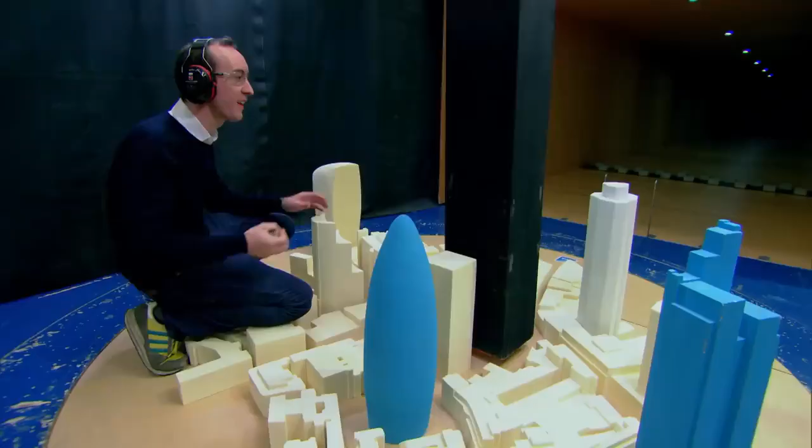The most technologically advanced skyscraper on the planet. Look at this super tower, 632 meters tall. Built to withstand earthquakes and typhoons. I still feel like it's a dream. It's still unbelievable. And the pioneering historic designs. This is just amazing. This is real engineering happening here. That made the impossible possible.

Shanghai is a mega city. With 24 million inhabitants and rising, it's one of the most densely populated cities in the world, with ambition to match. Shanghai will always be one of the international cities in the world and one of the most important ones in the world. This global financial center holds 10,000 people per square mile, and the only place left to build is up.

In the mid-1990s, development began in an area of farmland on the East Riverbank, known as Pudong. If you look at Pudong today, 20 years after, it has been transformed into an international center for business from a quiet farmland, and today is dominated with a lot of new high-rise buildings. In November of 2008, work began on the most impressive of them all.

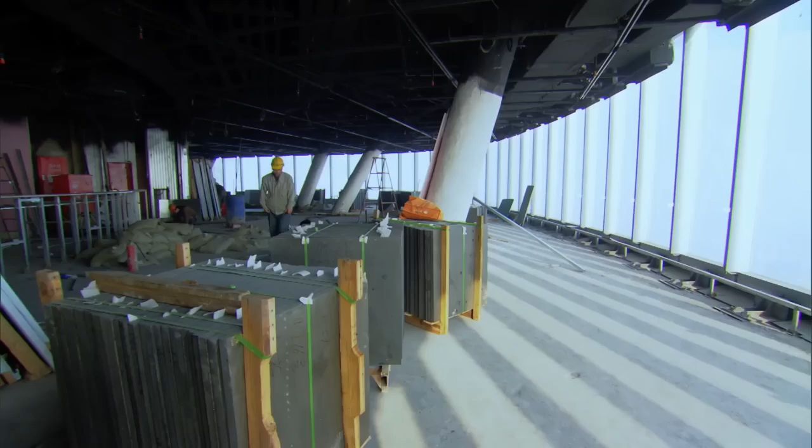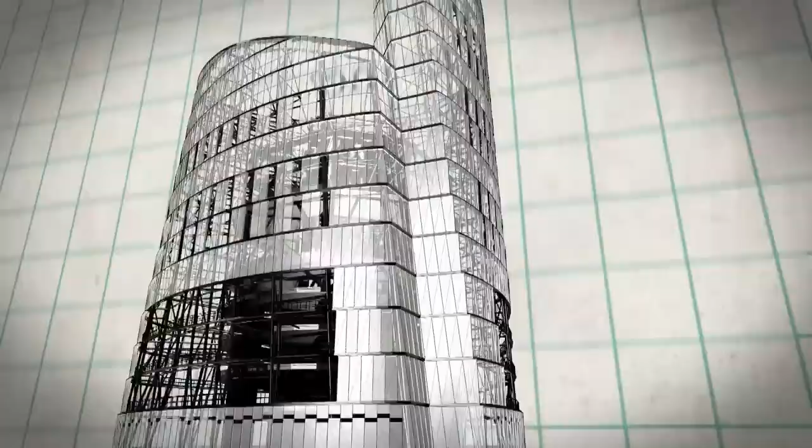At an astounding 632 meters, the Shanghai Tower will be the second tallest building on Earth, the tallest in China, and one of the tallest ever built in a seismic zone. It will be the most advanced building of its kind on the planet, with 128 floors and 9 indoor gardens, where 16,000 people will work, sleep and shop, making it a true sky city.

And yet, this is one of the most difficult places on Earth to build a skyscraper. Building a super high-rise building in Shanghai is quite unique because you have to deal with the wind load and also the earthquake load. For Dennis Poon and his fellow engineers, it's a seemingly impossible challenge. I cannot believe that today we're designing the tallest building in China and also the second tallest building in the world.

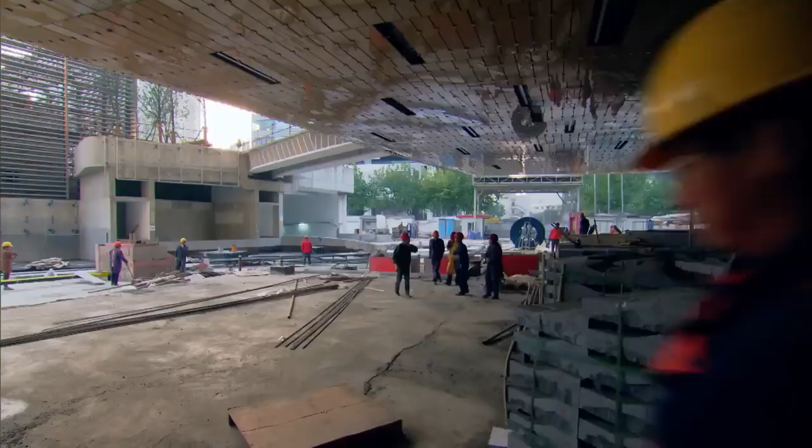The engineering complications begin at this mighty tower's roots. Because not only is Shanghai an active seismic and typhoon zone, but amazingly, this megacity is sinking into the soft soil below. The land under this massive metropolis is deflating like a giant air mattress, as its shallow water table collapses under the weight of its modern buildings.

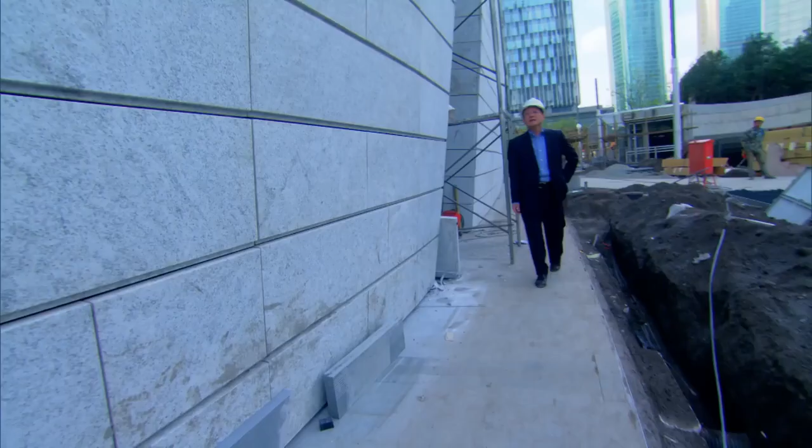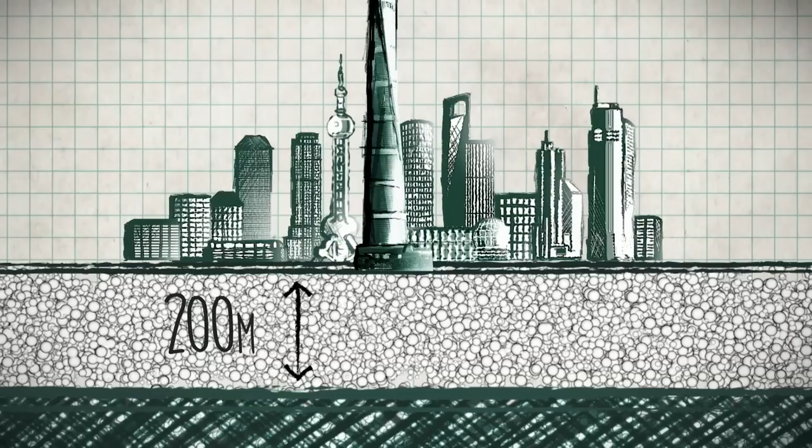For the Shanghai Tower, one of the biggest challenges is the foundation to support this super tall building. With its weight of 850,000 tons, how do you support it in the soft soil condition, which is local in Shanghai? The solid bedrock is 200 meters down, with Shanghai itself wallowing on a soft layer of sand, clay and soil. A geotechnical nightmare ready to swallow an 850,000-ton building like the Shanghai Tower.

So we have to design and build this foundation for the tower to deal with these challenges. And the engineers only have one shot, as constructing a tower this tall leaves no room for error. For a super tower, of course, the whole design challenge is to do the foundation right, so you don't have future problems, because you can't fix it later. The engineers will have to look to the great innovators of the past to defy this seemingly impossible challenge.

Once upon a time, the modern world of skyscrapers was inconceivable. Early man was limited by what nature would provide. And for the ancient Egyptians, taller had to mean wider, and an awful lot of manpower. Unless you believe in some of the more otherworldly theories. And when it's come to building towers, the ground below has frequently thrown a spanner in the works. Mamma mia! In order to create a skyscraper 11 times taller than Pisa's famous Leaning Tower, the designers of the Shanghai Tower will need to draw on the inspiration of 19th century engineering pioneers.

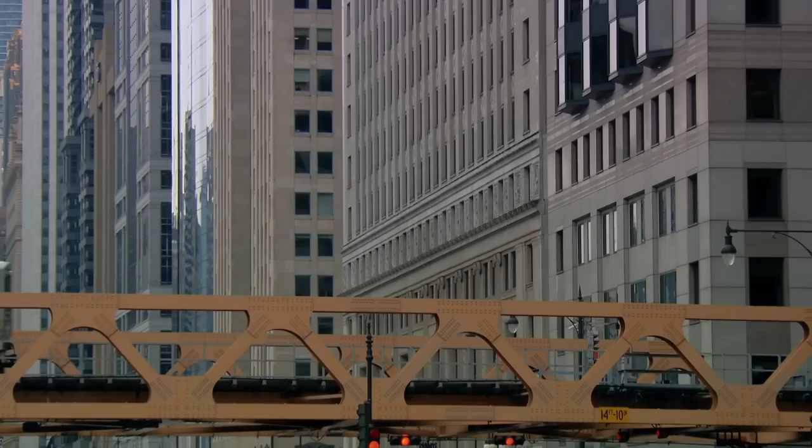We've got soil here that is incredibly squishy. Underneath this shorter, smaller layer of earth, we've got a very, very deep layer of soft, squishy clay. This is a really difficult thing to build a skyscraper on, of course, because when you load it, the building's going to sink. As property in downtown Chicago grew ever more valuable and the city began to boom, the need to grow higher and maximize space posed engineers a problem. Taller buildings would mean heavier buildings, and, as they had discovered, there was a limit to the weight that the local soil could take.

This is the auditorium building of Roosevelt University, designed by Adler and Sullivan in 1889. It's a national landmark and so important to Chicago as well.

The building is 72 meters high. When it was completed in 1889, it was the tallest building in the city, one that would have been unthinkable just a few years earlier. And the radical innovation that made it possible came from engineer Dankmar Adler.

We're headed down to see Adler's specially designed foundations to deal with the soil here in Chicago. Previously, the whole weight of a building would bear down on its walls, which would sink into the clay like a cookie cutter.

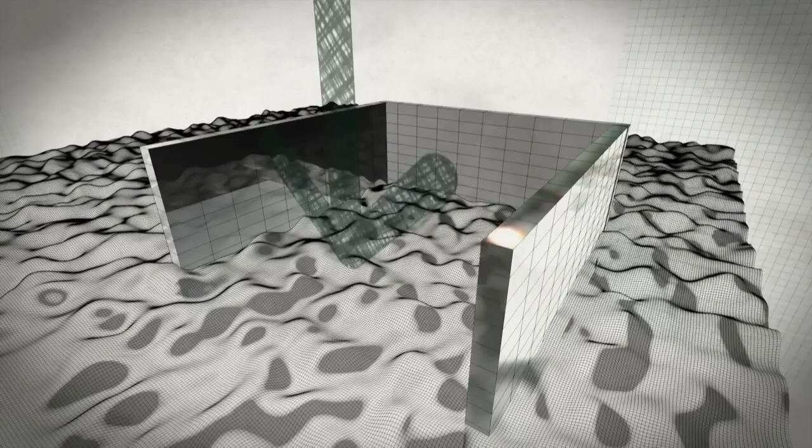Adler's innovation was to use wood and steel crossbeams encased in concrete to create a reinforced concrete raft that the 110,000-ton building sits on. I'm going to illustrate what's happening here with this piece of modeling clay used to represent the clay that's under our feet here in Chicago, this sort of peanut butter jelly-like substance.

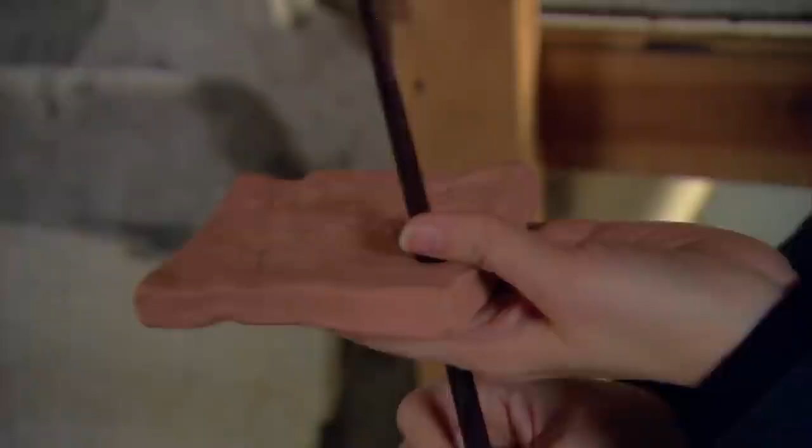The clay is really quite deep, and the bedrock doesn't start in Chicago until 75 to 100 feet below the surface. So I've got my chopstick here to sort of illustrate, and I take my structure and I go through the hard pan, and they just didn't have the technology in the 1880s and the 1890s to excavate that far down to bedrock. So instead, architects and engineers here in Chicago are coming up with new ways to solve this problem.

The method that we're standing on here is sort of the equivalent of this kind of penny that I'm going to illustrate. So this pad or this raft is put down, and then the building, the column, is put on top of that. And you can see that I can push it down a little bit into the clay, but not really that far. This is distributing the load.

Adler's revolutionary engineering solution made building on substandard ground possible. And today, the city's tallest building, the Willis Tower, rises 442 meters, more than 6 times the height of Adler's auditorium. But despite its influence, the auditorium's design wasn't 100% perfect.

So on the north edge of the building, we've got these large, heavy exterior walls that are much heavier than what's happening on the interior of the building. And we can see the challenge with that, the fact that this is much heavier and this is much lighter in the building, with this long crack here in the floor. And we can also illustrate that pretty well with these marbles.

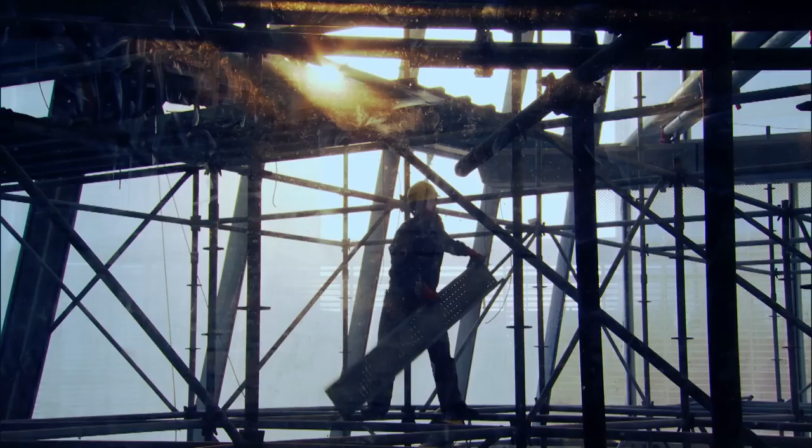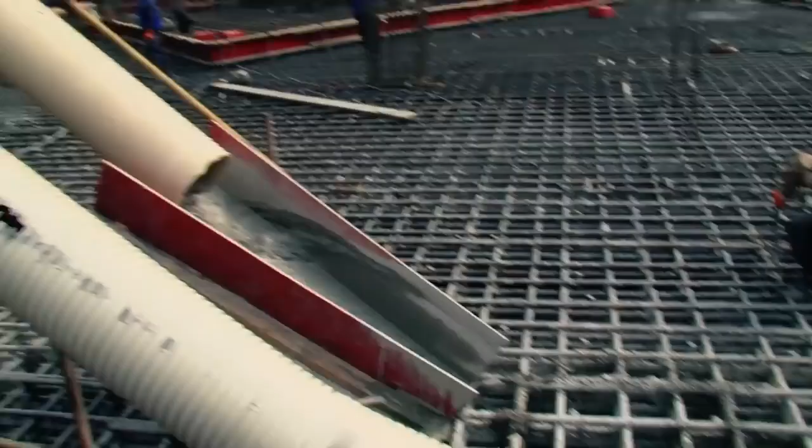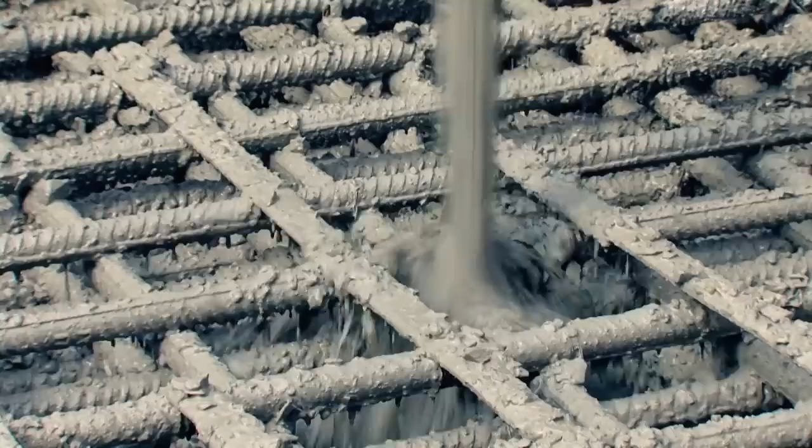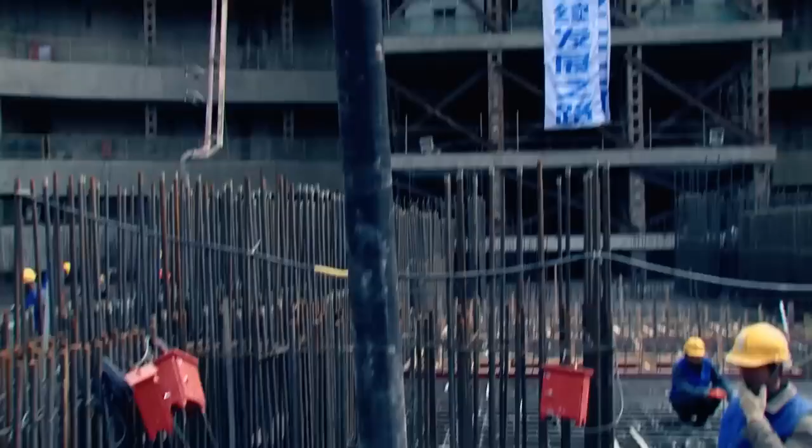In 2008, a 2-year operation to build the foundations begins. First, they sink hundreds of deep supporting piles into the soil, then begin pouring the raft or mat foundation. Construction of the mat foundation so deep below grade is a big challenge. It takes a world record 60 hours of continuous pouring to create the mat, a process involving 2,000 workers and 450 concrete trucks. We basically used almost all the concrete trucks in Shanghai, and finally we overcame this challenge.

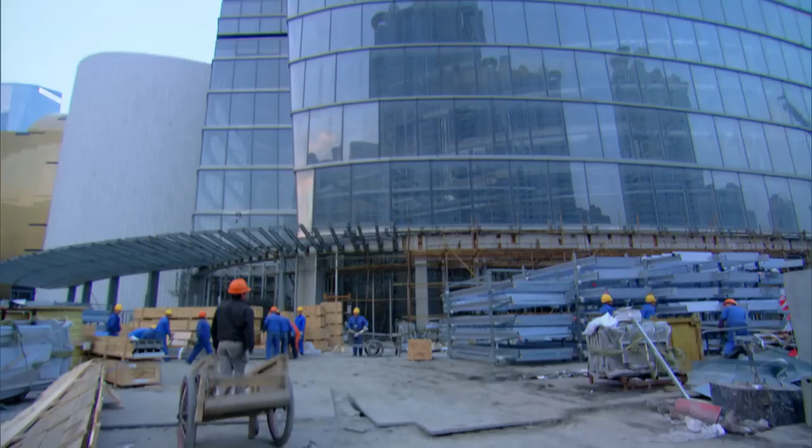All in all, the mat soaks up 61,000 cubic meters of concrete. Another world record. 61,000 cubic meters is a lot of concrete, comparable to the Hoover Dam many years ago in the States. Without the pioneering work of engineers like Dankmar Adler, building a tower this high in Shanghai would have been an impossible dream. You can see the sheer scale of this tower, and you can imagine how big the foundation we need to support this tower in a soft soil condition. And we got it done right. Look, I even cannot believe it.

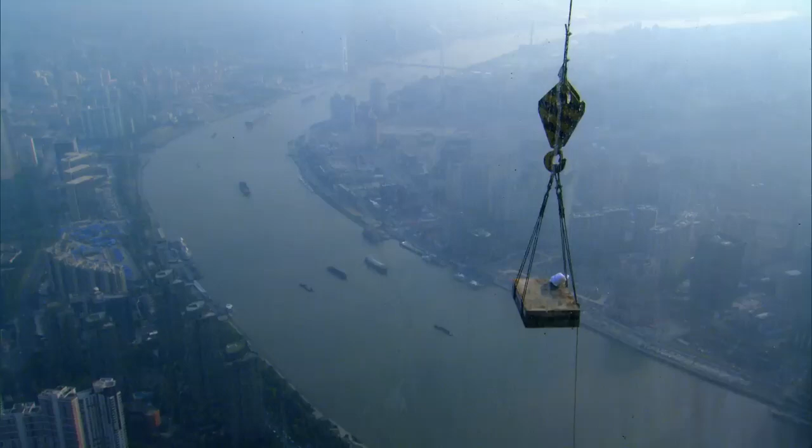Begun in 2008, the Shanghai Tower will be the most advanced skyscraper in the world. The tallest building in China and the tallest ever built in a seismic zone. It is a fantastic piece of engineering. We are all grateful that we have the opportunity to work on this iconic project.

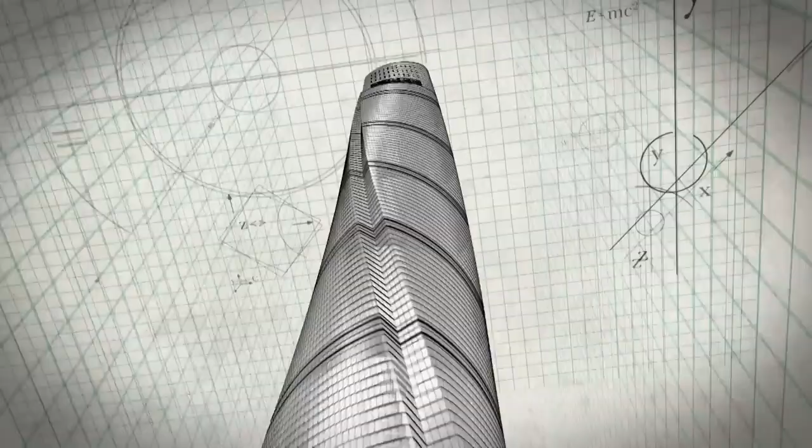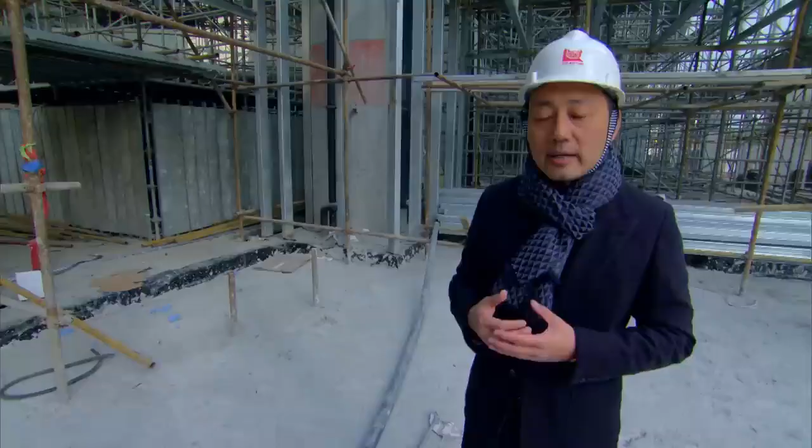The tower is a massive 632 meters tall and will consist of 128 stories of cutting-edge engineering and contain gardens, shops, hotel, office space and residential accommodation. Actually, to build it and also overcome many engineering challenges, to me, it's quite incredible and unbelievable. But in creating a building this immense, the architects and engineers have set themselves a seemingly impossible challenge.

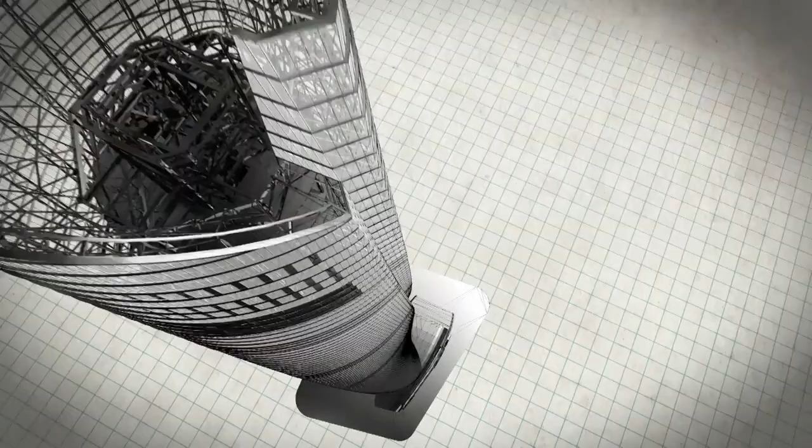Each floor weighs an average of 6,500 tons, making the building enormously heavy. The structure itself has to support a total of 850,000 tons. For a super tall building, you have enormous forces to support. We're not building a house, we're building a 128-story building, the second tallest building in the world. It's a challenge that would have been impossible if today's engineers weren't able to draw on the great innovators from history.

Once upon a time, the maximum height of a building was determined by the thickness of its walls, because the weight of each story had to be supported by the floors below. It meant tall buildings remained the realm of the rich and powerful. Medieval religious architects enabled thinner walls and large stained glass windows by using external supports called flying buttresses. But these also made buildings grow sideways and were still the preserve of the wealthy church. Bless you, my child. But there was a revolution on the horizon.

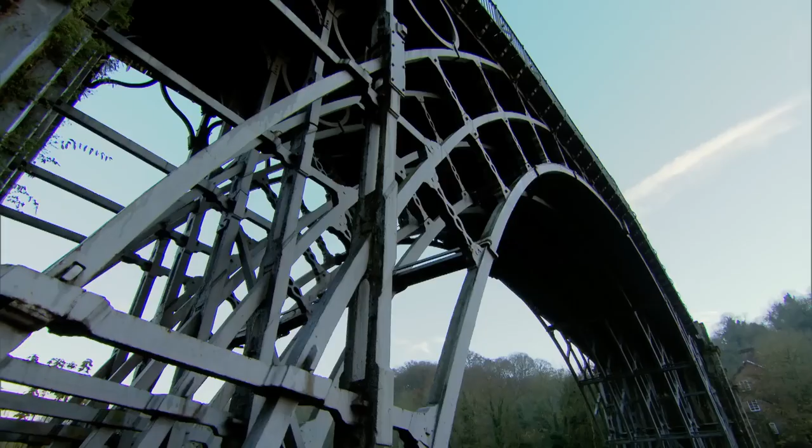And this seemingly innocuous and picturesque region surrounding the River Severn in England was the crucible of it all. Shropshire was at the heart of the Industrial Revolution, the Silicon Valley of the 18th and 19th century. Its engineers were at the very cutting edge of technology because they had mastered the production of iron. This area gave birth to some of the greatest engineering pioneers of our time and enabled the construction of iconic structures like this Iron Bridge, the first cast iron bridge of its kind in the world.

But just a few miles upriver is a somewhat less iconic, but arguably much more significant building. It wasn't until about 20 years ago that the historical importance of this building was properly understood, which is why it's fallen into disrepair. This crumbling red-bricked mill is one of the most important buildings in the world. This incredible but rather sad and dilapidated building in Shrewsbury is arguably the world's first skyscraper.

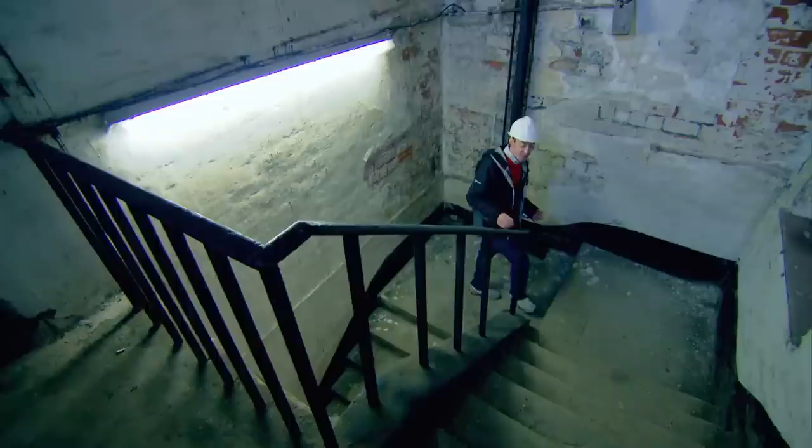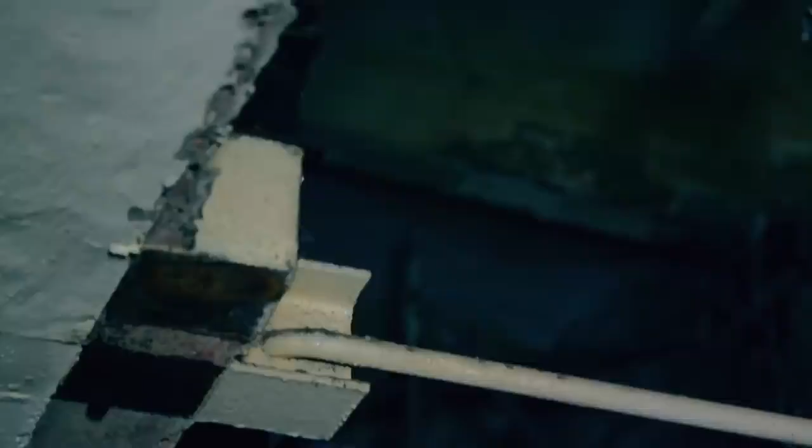It's the first time that iron was used in a multi-story frame construction, and it really paved the way for tower blocks and skyscrapers that we know today. Built in 1796, Ditherington Flax Mill was the brainchild of engineer Charles Bage. And he drew on the region's groundbreaking use of iron to build the first metal-framed building on the planet. Previous to the iron frame, the taller the building, the thicker the walls had to be to support them. But with Bage's design, the walls could be thinner, which meant that the rooms could be much larger. It also meant that you could design buildings much taller.

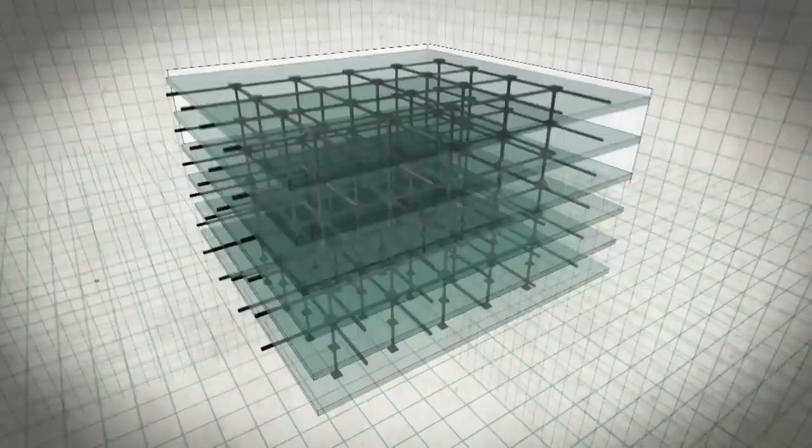In Bage's design, all the weight of the building was borne on its iron frame. So none of the walls were load-bearing, making the sky the limit for the first time. This main building had 5 floors, including this attic, which was previously unheard of. It had a working area of over 2,800 square meters, or 31,000 square feet. And these narrow, relatively lightweight metal beams would be able to support much more weight than the solid brick walls of previous buildings.

This simple but brilliant engineering solution meant that Bage's flax mill was the forerunner of almost every large-scale building in the modern world. What Bage achieved in this building was truly remarkable. In building the Shanghai Tower, its engineers are employing the same principles as Charles Bage's 5-floor flax mill, but on a whole new scale. The 128-story building, however, will have a steel frame instead of iron.

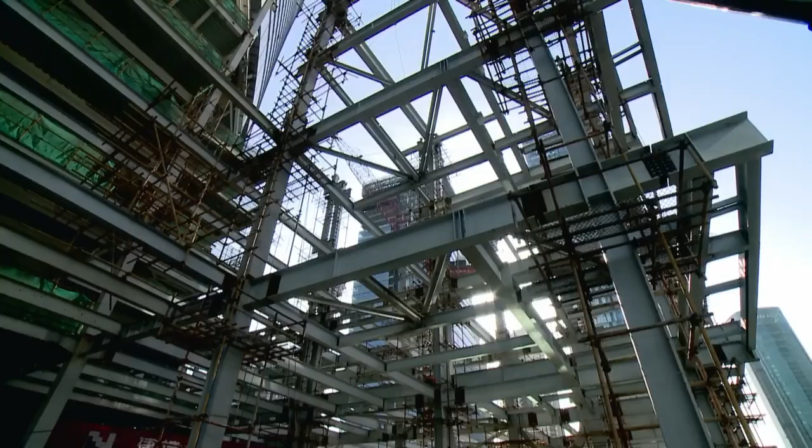The advantage of structural steel is it's lightweight, it's high strength, and easy to erect, and can be prefabricated in the shop with better quality control. Because the steel bears the weight of the structure, the external walls no longer need to be load-bearing. They don't even need to be flat or straight. They can be made from a variety of lightweight materials, such as glass. And architects can mold them into any shape they want to express their vision.

Jun Xia was one of the lead designers on the project. When you are in the city looking at this building, from every different view you look at, the building looks a different shape. The movement looks different. You feel like it's alive, something like a living organism, you know, because it doesn't feel like a dead, cold object.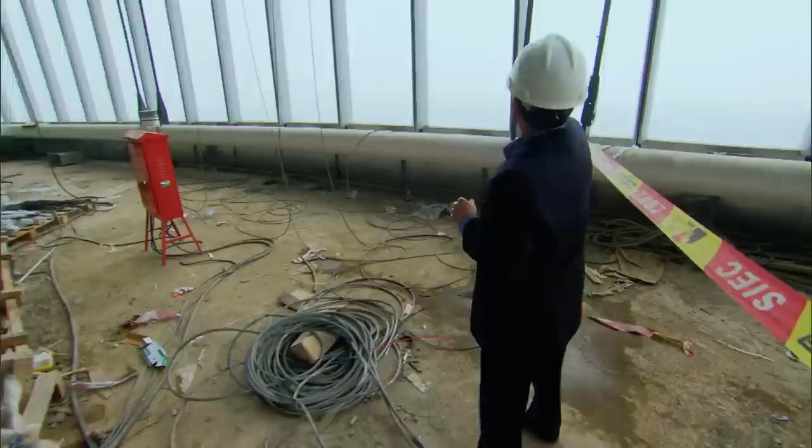The whole building is clad in a series of glass walls, each of which can be suspended over many floors like a giant curtain, thanks to the strength of the steel rods that hold them in place. We're at the top of the 101st floor of the building, and you can see the curtain wall is being hung 14 floors above us.

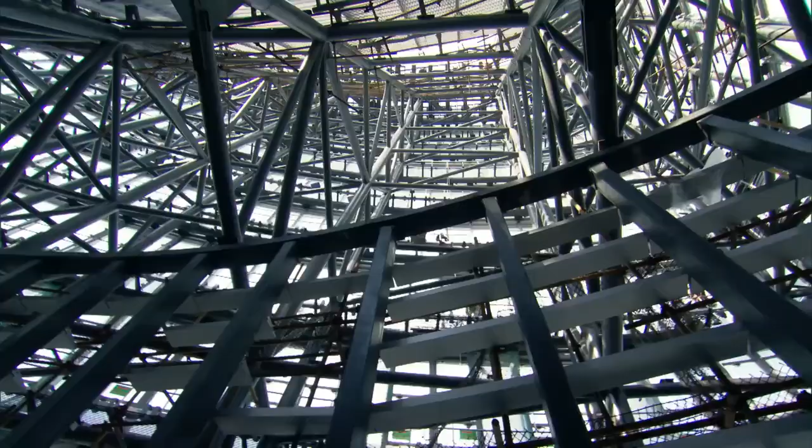Between the curtain wall and the inner core, which houses offices and hotel rooms, the designers have allowed the building to breathe, creating a massive open atrium, only possible because of the building's lattice-like steel frame. Here we are standing on the 8th floor of the building. You don't want to block too much sunlight with a massive structure. It opens up the airy feeling.

Yet despite the use of super lightweight materials, the Shanghai Tower weighs in at a staggering 850,000 tons. And to stand up to Shanghai's triple whammy of high winds, earthquakes, and substandard soil, the designers would have to reach for the history books again.

Ready whenever you are, Rich.

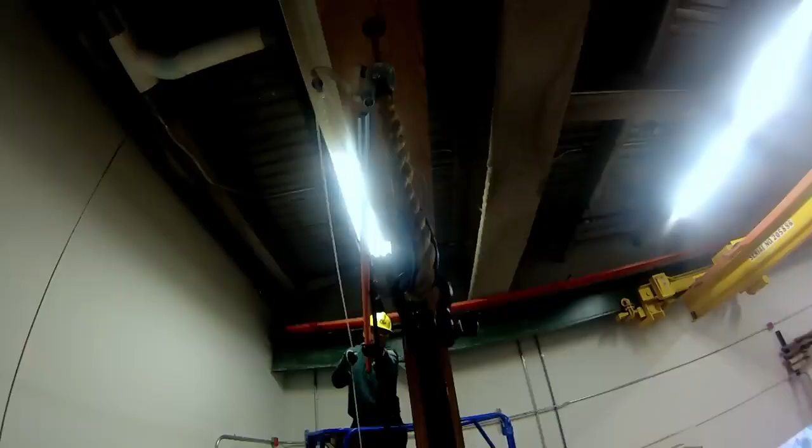With 24 million inhabitants, Shanghai is one of the most densely populated cities on Earth. And the only way of expanding its globally important financial center is to reach for the skies. 632 meters tall, the Shanghai Tower is being built as a living city in the clouds. It will house offices, shops and hotel rooms, as well as conference and concert halls.

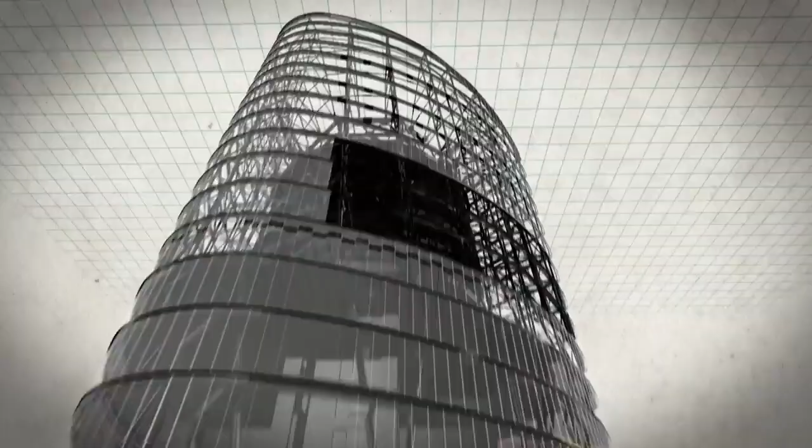If we turn this building down, it's going to be 600 meters long, about 6 urban blocks. So in a way, we think each of these zones is a community. But in creating a super tower in which 16,000 daily users will work, rest and play, its designers have set themselves a lofty challenge: how to transport its population around this massive structure.

Who wants to come up to a 100-story building and walk up there? I can see many office buildings with a huge crowd in the lobby. It's an engineering feat that would be impossible without one of history's great innovators.

By the mid-19th century, the world's skylines were still relatively skyscraper-free. For one reason, no one wanted to take the stairs. Unlike the penthouses of today, the higher you lived, the poorer you were. Mustn't grumble. Steam-powered and hydraulic lifts were being used in mines and factories for freight, but they were too dangerous for people. The ropes on the pulley system were inclined to break.

But city skylines were about to change. Thanks to a man named Elisha Otis, in 1852, he came up with an idea that revolutionized the world of construction, pioneering a simple mechanism that changed the way we use tall buildings forever.

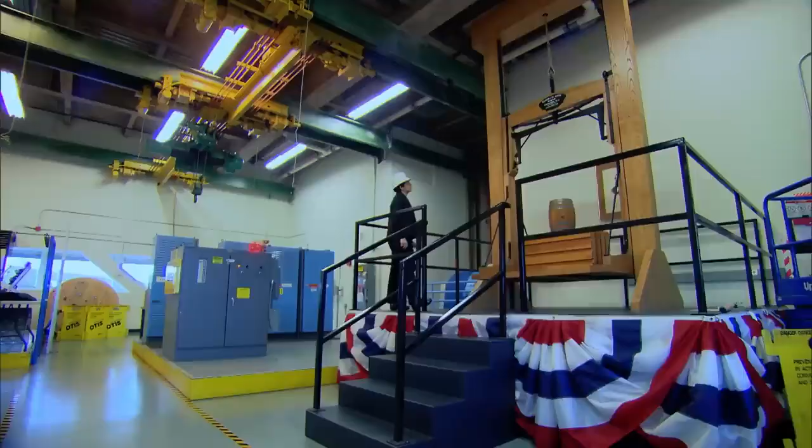So we're here in Bristol, Connecticut at the Otis Elevator Company test facility. This is where they test the newest elevators that they're going to install in buildings across the world. But they also have this replica of a device that Elisha Otis first constructed for the Crystal Palace exhibition, the World's Fair that ran from 1853 to 1854.

The World's Fair was the perfect shop window for Otis, who was a showman as well as an inventor. He knew that the eyes of the world would be upon him if he could prove that his idea for protecting passengers was safe as well as practical.

So I think it's important to remember that Otis didn't invent the elevator. Certainly there had been ways of moving goods and people up and down from floor to floor using hoists and pulleys for centuries. But what Otis did do was to recognize that people were afraid of going into an elevator. So at the 1853-1854 World's Fair, he builds this device to provide a brake, a safety, in case the rope broke.

With his showman's hat on, Otis decided the best way to prove his idea was to put it to the test, using himself as a guinea pig. In front of an expectant audience, he stepped onto the platform, rose above the crowd, and gave the signal for the rope to be cut, a potentially fatal step.

So let's see if Mr. Otis's invention still works. Ready whenever you are, Rich.

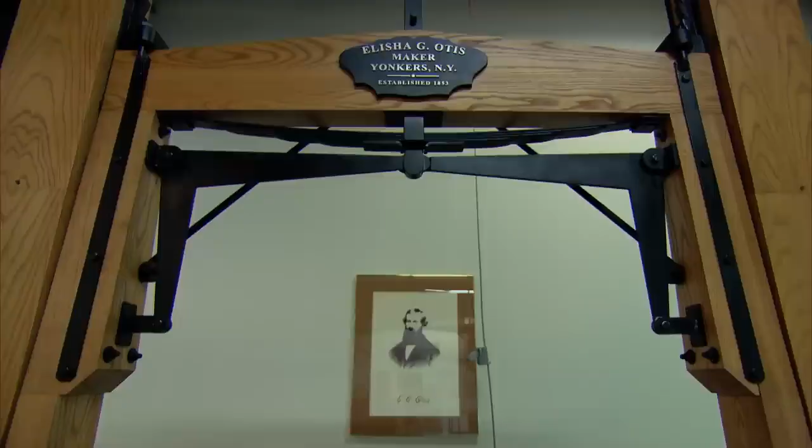The system features a wagon spring, which is held up by a rope which keeps it in a state of constant tension. When the rope is cut, the tension in the spring is released, which causes pins fixed to the side of the spring to lock into a ratchet located in the wooden frame. This brings the elevator to a complete stop, preventing it from falling and injuring any passengers.

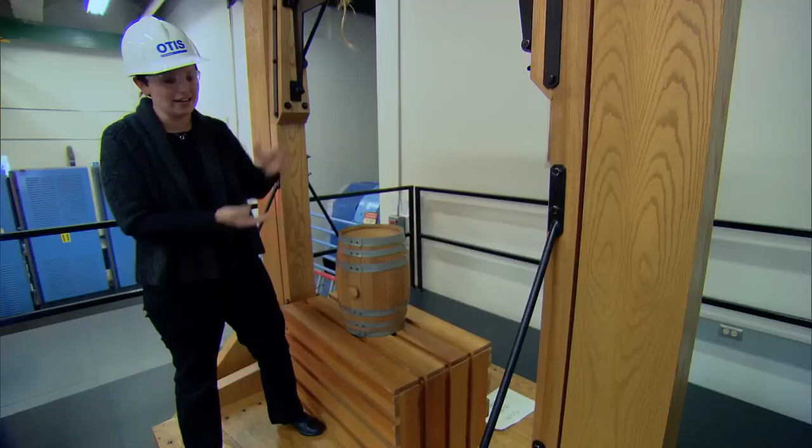And all these years later, every single elevator today around the world has a similar safety device that is allowing passengers to feel safe in tall buildings. And I didn't plunge to my death. Otis's invention transformed the world's skylines, and cities like New York that couldn't expand sideways could now reach for the skies.

Fittingly, in 1913, it was the Otis Company that were commissioned to provide the lifts for one of New York's most iconic skyscrapers, the Woolworth Building. By 1916, more than 100,000 people had paid their 50 cents to ride the elevator to the observation deck at the top. And now, 100 years later, those original Otis elevators are still being used to carry office workers up and down.

Otis's invention meant that instead of the poor being consigned to the building's upper levels, the value of floor space now increased as you went higher. Penthouse living was what everyone dreamed of. As we drive through New York, it's easy to forget, I think, that within just a short span of time, just about 160 years, all of these skyscrapers have been constructed. And so the rise of the elevator and the rise of the skyscraper are so closely linked.

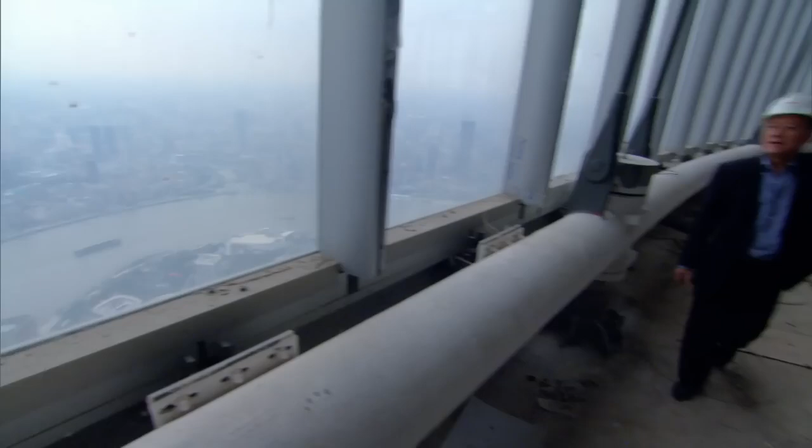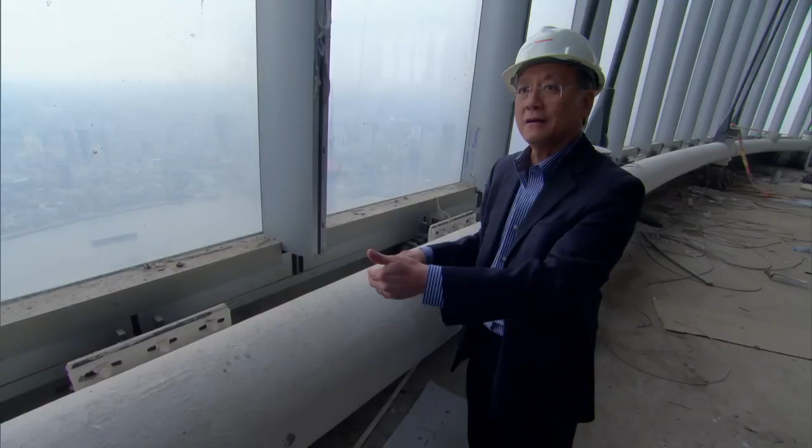Otis's first passenger elevator traveled at 0.2 meters per second. At that speed, it would have taken nearly an hour to reach the top of the Shanghai Tower. Look outside. We are more than 100 stories above ground. You can see the magnificent view. For this tower, we are using the world's fastest elevator, traveling at 18 meters per second, which is faster than the speed of a car traveling at normal cruising speed.

In all, the tower has 106 elevators, single and double-deckers, including the world's furthest traveling single elevator, at 578.5 meters. And along with the residents, shoppers and office workers, it will transport thousands of tourists to its top floor observation deck.

We are on the street level right now. You see this 128-story building. The view at the top of the Shanghai Tower will be unique. And when it's all done with the elevators, you can get up from the ground floor to the top up there in 35 seconds. Marvelous.

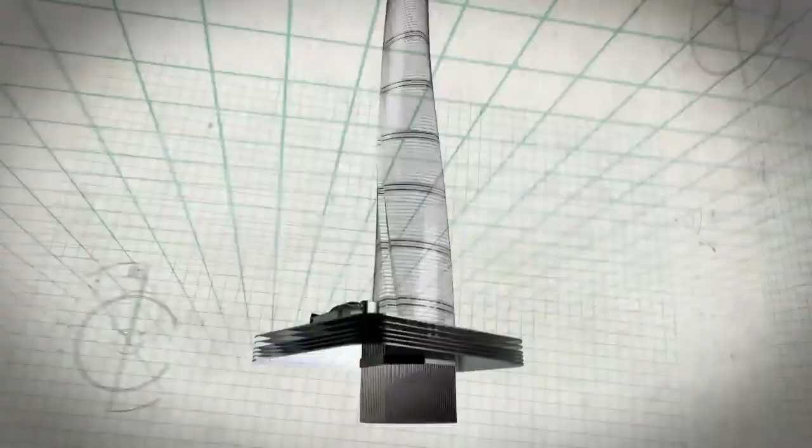The Shanghai Tower's 632-meter elevation won't only provide stunning views of the metropolis below, it will also present a massive obstacle to the wind. Shanghai is in a typhoon zone, and defending the tallest building in China from the immensely powerful and potentially devastating winds that sweep through the city is a major challenge to the engineers.

The first wind tunnel was constructed in 1871, a full 30 years before the Wright brothers' inaugural powered flight. But they had always been very much geared to aeronautical engineering. That was until brilliant engineer Jack E. Cermak evolved the technology to enable the world's skylines to grow ever higher. In the late 1950s, Cermak and his contemporaries pioneered the use of new wind tunnels.

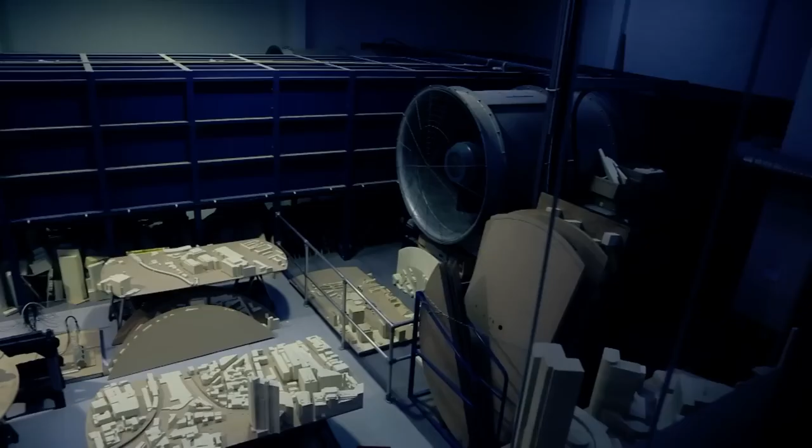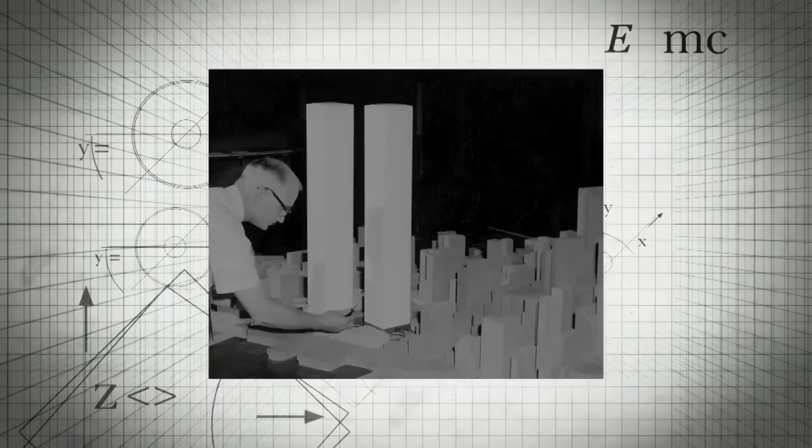Professor Rhys Morgan is visiting wind engineering firm RWDI, who have drawn on Jack Cermak's innovations, which included much bigger tunnels than for aeronautics and used irregular shapes to mimic the unpredictable winds that can hit cityscapes. Blocks like these on the floor create the kind of turbulent atmosphere, the turbulent winds that you see in cities and urban environments. So they're perfect for testing structures that we want to build in cities.

One of the early skyscrapers to be tested in Cermak's wind tunnel was New York's World Trade Center, then the world's tallest structure. The innovations that resulted feed into the design of every new skyscraper, including the Shanghai Tower. A scale model is being placed into a mock-up of the London skyline to demonstrate how wind can dangerously affect tall buildings.

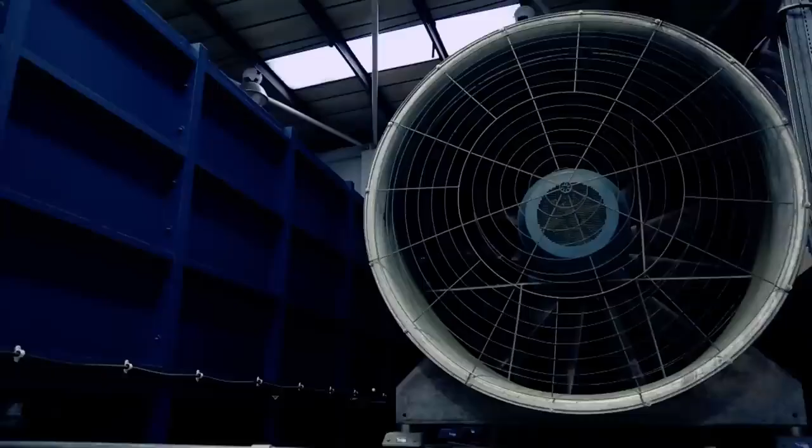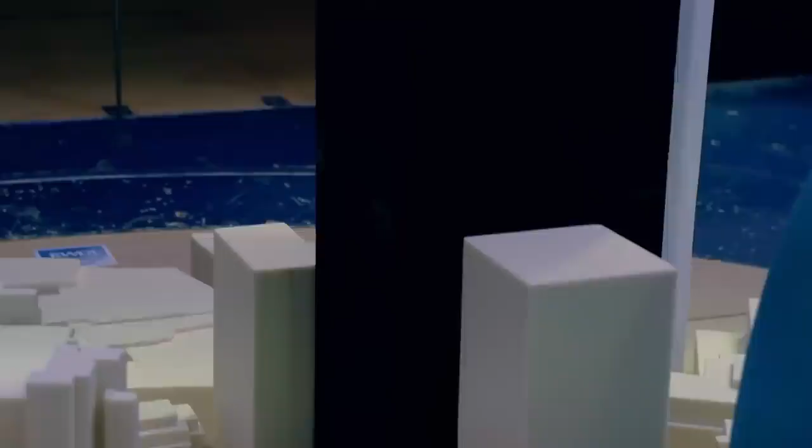Wow, it's really windy. As the wind rushes past the structure, it forms into eddies of low pressure on either side. So the wind is coming in here, it's hitting the side, and then as it comes around the corner, it produces a low pressure region here. And that causes the building to move this way, but then that means that the wind coming around this end starts to cause a little bit of movement this side and low pressure. So we start to get this low pressure, low pressure, low pressure, low pressure, and that causes this oscillation back and forth.

This is just amazing. This is real engineering happening here. That's moving a good 5 centimeters either side. I wouldn't want to be on the top of this building if it was a real building in the city. For architects like those that designed the Shanghai Tower, the challenge is to come up with a shape that reduces those vortices.

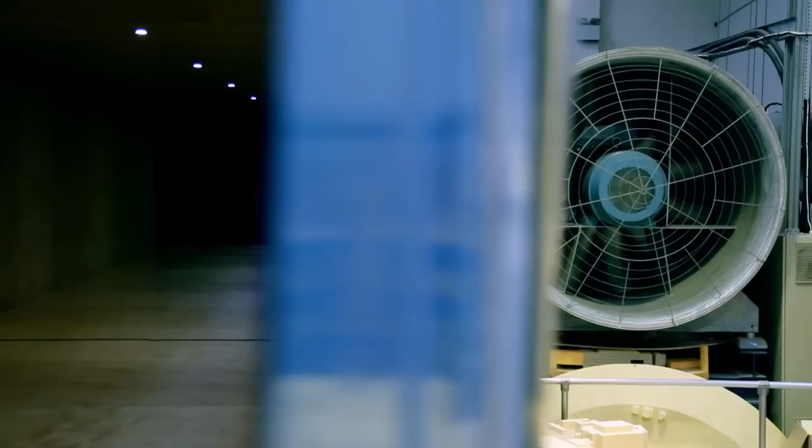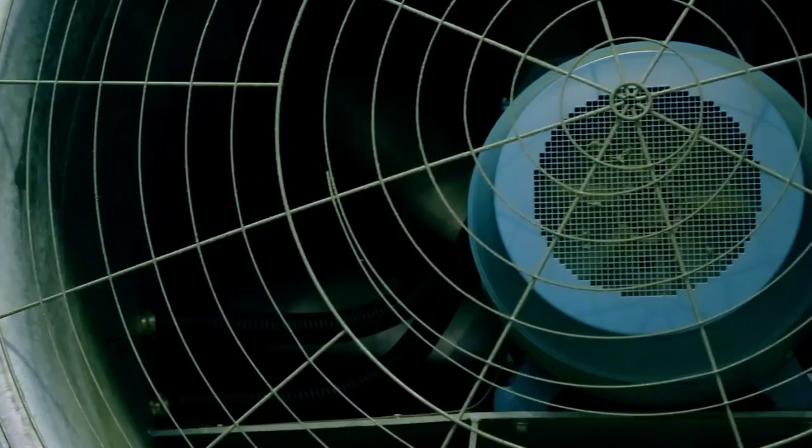Okay, let's try this one. This time, the building is tapered like an elongated pyramid. And you can see there's very, very little movement. Let's turn it up a bit more. We're running at 3 times the wind speed of that very first model that we saw. And the building's just not moving anything like as violently.

Because of the tapered shape of the building, the wind creates vortices of different sizes at different heights. It's causing some oscillations down here, but they're much slower than the oscillations occurring at the top end. That means that different parts of the building are trying to shake at different rates, with the net result, in this case, that they cancel each other out. And so it prevents the building from oscillating quite so violently.

Jack Cermak's invention has allowed city skylines around the world to change radically. Today, no one would think of building a skyscraper without first testing it in a wind tunnel. The Shanghai Tower is tapered, but it also has a distinctive twist, which is directly influenced by tests like this. The design reduces wind loads on the building by 24%. The twisting of the building is a great example for engineers that can combine creative architectural design with good engineering when we work together in tandem with each other.

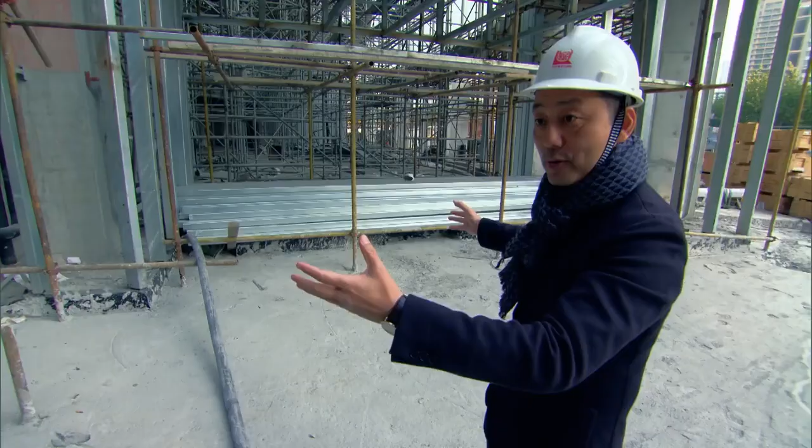The architects also designed a notched V running the entire length of the spiral. Number one, if the building is a continuous spiral without this V, you don't understand the spiral as much. Once you have this break, the V, you can actually read the building's moves, the spiral shape, much more clearly. Number two, we actually make this an entry to the office zone. So it's very visible, very easy to remember, right? People don't get lost. Then number three, eventually, we make this all LED graphic. So it's like a river runs through it. It's very, very cool.

The notched V shape started out as an architectural flourish. But when they tested it in the wind tunnel, the designers of the Shanghai Tower made a discovery as welcome as it was unexpected. This notch also helps to cut down the turbulence effect, or the vortex shedding, of the building. So the tapering shape of the building helps the aerodynamics, the twisting helps, and the notch helps. And at the same time, the tapering also lowers the center of gravity of the building. That gives us more stability. The lower the center of gravity, the more stable the building is.

But the Shanghai Tower faces a natural force potentially even more dangerous than typhoon winds. And yet again, the engineers will need to call on the great innovators of the past.

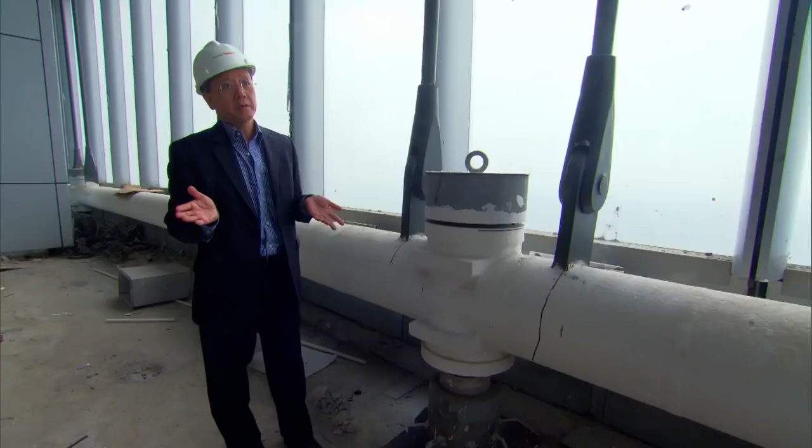Shanghai Tower is the second tallest building in the world. Of course, we're not only designing this building for typhoon wind load up to 120 miles per hour, we also have to design it for significant and severe earthquakes. To overcome the challenge, its engineers will have to look to history's great innovators.

Earthquakes are among the most powerful of all natural disasters, leveling buildings and triggering tsunamis. Neighboring Japan is the most seismically active country on Earth. For years, no one could understand why regular buildings would collapse in earthquakes, while traditional pagodas stayed standing.

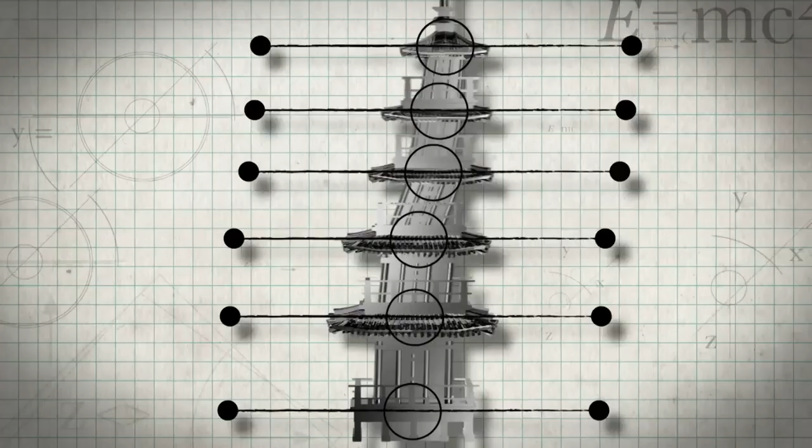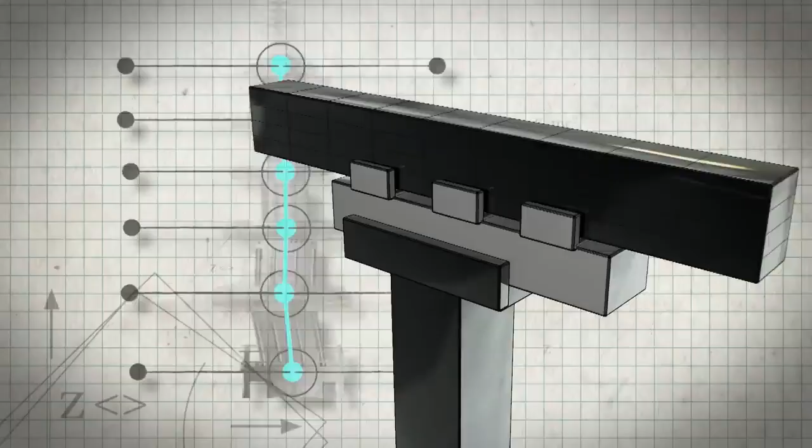Pagodas are typically 5 floors high, but each floor is capable of moving independently, so when a quake strikes, its snake-like pattern keeps the center of gravity more upright than a rigid building would. The wooden joints that support each floor consist of several separate components, so each part can slide and move, and the friction they create acts like a damper to soften that movement.

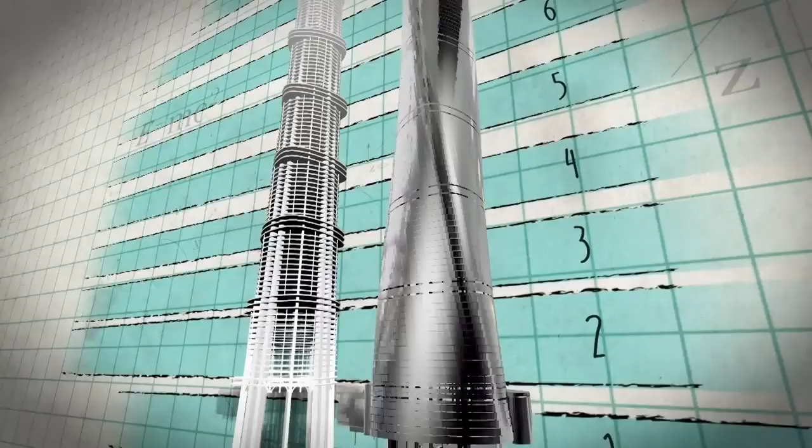The whole of the Shanghai Tower has a very similar template to that of a pagoda. The structure is divided into 9 vertical zones around a central composite steel and concrete core. Huge perimeter columns and outriggers are also fixed to the central core to further brace the tower against natural disasters.

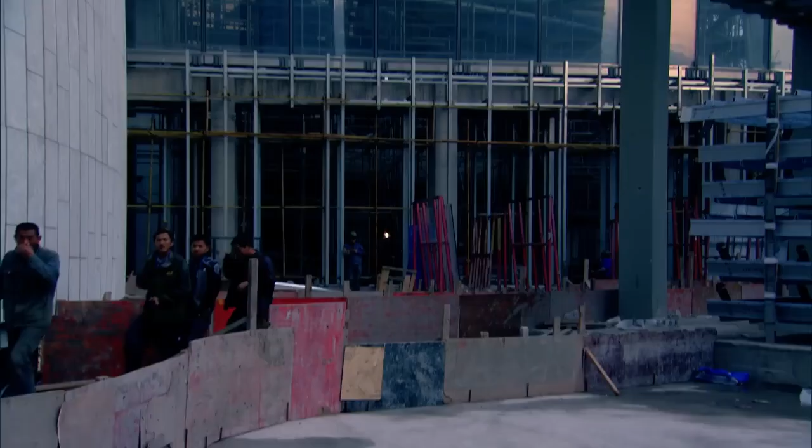The core is just like the main trunk of your body, and the exterior column outside is like the ski pole. And this steel truss member is connecting your body and the column, giving a much better stability for the building to resist earthquakes. The earthquake-proofing measures extend from the base of the tower right to its tip.

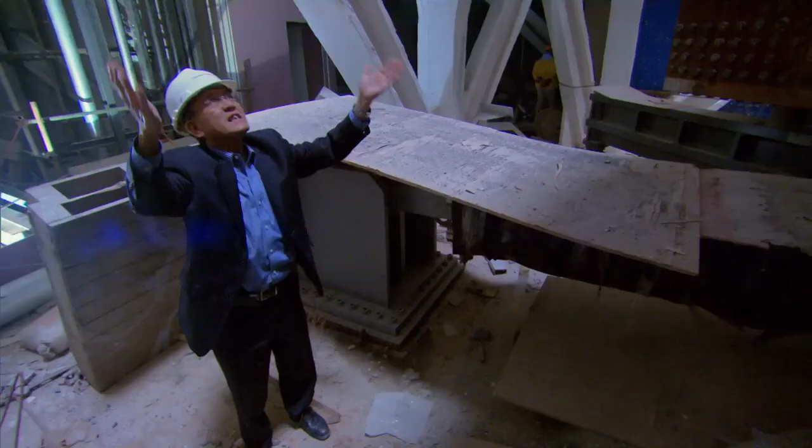Here we are, coming up to the 125th floor of the tower, which is one of the most important rooms in the building. So what is it that makes this such a key part of the structure? The answer is suspended above Dennis's head. You can see we have 1,000 tons of steel block being hung 4 stories above us. So why would engineers take up valuable floors and sacrifice the revenue they could generate with a steel block the weight of 600 family saloon cars?

Boston's John Hancock Tower, 60 stories high, was completed in 1976. Its then futuristic glass-clad design anticipated the skyscrapers we know today. When it first opened, upper floor occupants complained of motion sickness as the building swayed in the wind. This came to the attention of an engineer, William LeMessurier, who came up with an ingenious solution.

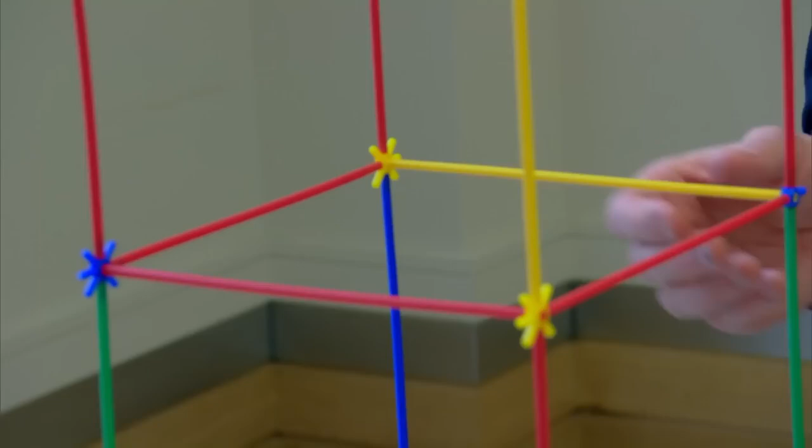What I've got here is a very simple model of a skyscraper. It's a beam structure going up several stories. Turning a handle at the base of the structure mimics an earthquake. With steel-structured buildings and glass buildings, of course, we're reducing the weight of those buildings, so you can build them much taller. But then you do have this problem with sway.

LeMessurier's genius was to find a way of counteracting and cancelling out the swaying of the John Hancock Tower. He took over the 58th floor and installed 2 steel boxes, each filled with several hundred tons of lead and resting on a steel plate. You have to imagine this is an 800-ton weight that I'm lifting up onto my skyscraper now. And I'm just going to tie it to the top of my structure.

The tuned mass damper, or TMD as it became known, had a dramatic effect. It's amazing. The structure is hardly moving. I mean, it's quite phenomenal. So what we're seeing here is the mass damper oscillating out of phase with the vibration of the structure. In a building like this, you wouldn't have an 800-ton ball flying around violently and smashing into the walls and things.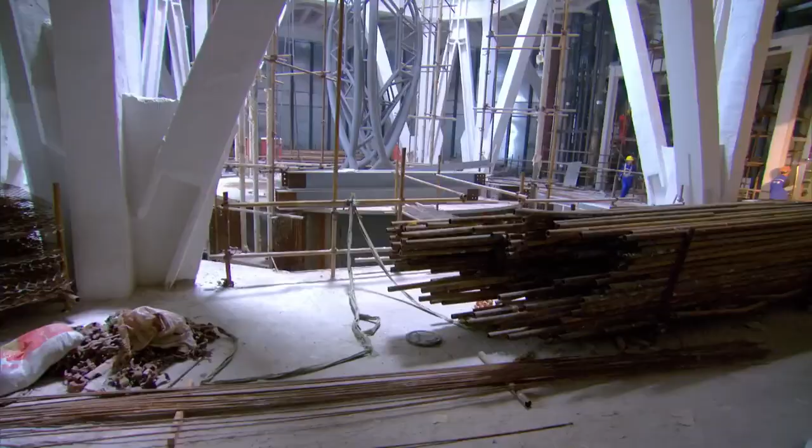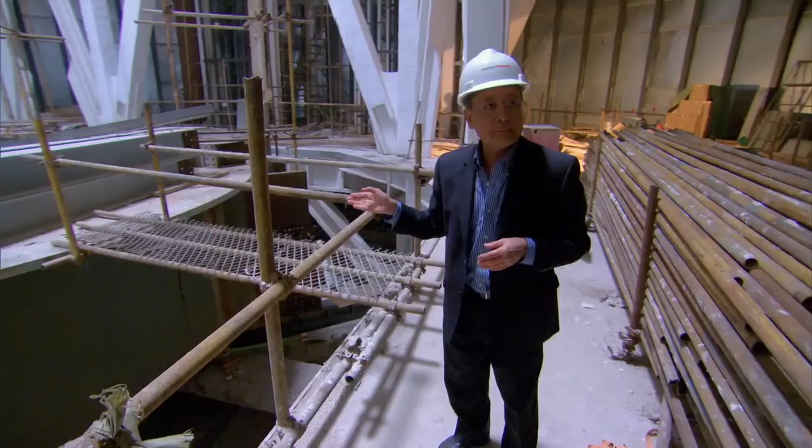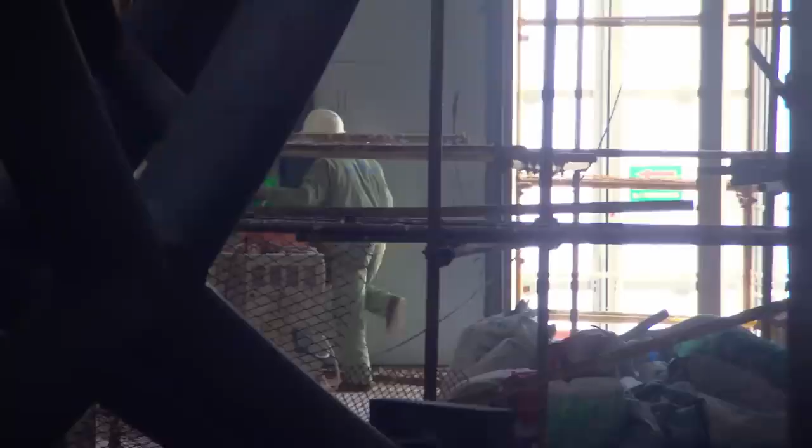We are walking to the upper portion of the TMD system, the mass damper system. Without this mass damper, we would have to use a lot more structural steel and material to stiffen up the building. So despite taking up 5 of the tower's 128 floors and weighing over 1,000 tons, it actually made the building cheaper and lighter to construct.

It's taken 15 years of planning, design and testing, and 7 years of construction to raise this super tower from its foundations deep in the Shanghai soil to the tip of its 128th floor. But by drawing on the innovations of the past, adapting, improving them, and making groundbreaking innovations of their own, the engineers, designers, and workers on the Shanghai Tower have overcome substandard ground, high winds, and earthquake risks, and succeeded in making the impossible possible.

Look at this super tower, 632 meters tall. It is exceeding my expectations and a lot of people's expectations.